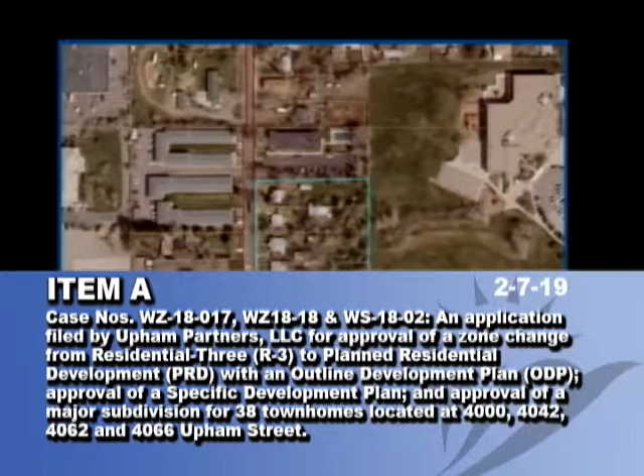So we'll start as we typically do. If we could have the lights come down a little bit in here so we can see the slides. Thank you. We'll start with the aerial. This is a 2016 aerial. The subject property at 4000 to 4066 Upham is outlined here in blue. It's almost square in shape and nearly 2 acres in size, and you can see there's 4 existing single-family homes on the properties. They range in age and in condition. They were built between 1928 and 1952. The assessor has them listed in fair to average condition, and you can see that they're pretty small in size. I believe the smallest one is about 700 square feet and the largest about 1,200 square feet, and notably smaller than the lots on which they sit.

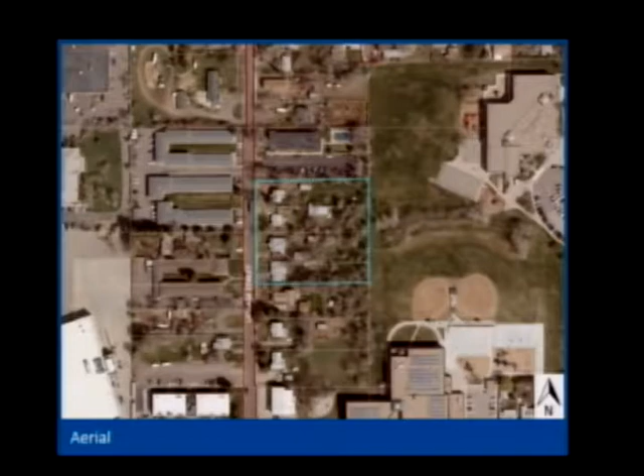You can tell from the roof lines in this image that there are a variety of housing types. So there's 4 multifamily projects that surround the property. One immediately to the north here is about 2.5 stories. 3 on the other side of the street, a C court, 2 buildings on a single lot, and then another sort of C court to the south. Those range in densities of 21 to 26 units per acre. Some of those were built before the city incorporated, which is why they exceed our 21 unit per acre density cap. There are a few more single-family homes to the south of the subject property and another across the street.

The property to the east is owned by Jefferson County Public Schools. It's about 19 acres. It's functioning as a campus. Stevens Elementary is to the south of their property on 38th Avenue. Sobesky Academy you can see on the northern side here. And then they have a variety of play fields and ball fields. The sort of forested area immediately east of the subject site is the school campus's detention area. It's a fenced area, and that abuts the subject property.

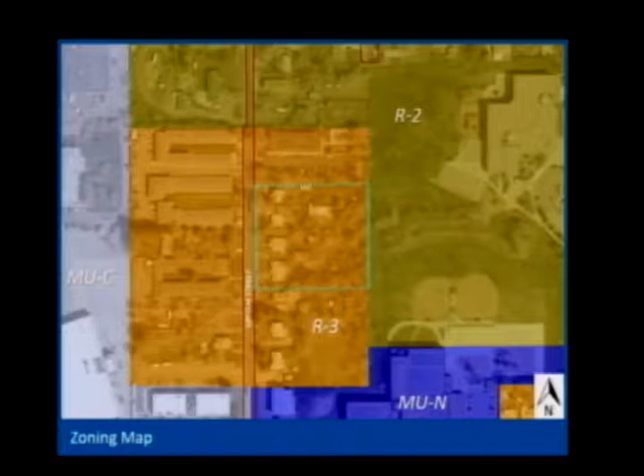As was mentioned, this application tonight includes 3 components. So the applicant is proposing to redevelop the site into 38 townhomes and to rezone the property from residential 3 to planned residential development. Any planned development in the city is comprised of 2 documents, the outline and specific development plans, and we'll be looking at both of those tonight. The ODP establishes the zoning and includes development standards. The SDP, the specific development plan, shows the details of that development: site plan, building elevation, landscaping, lighting.

The third component that we're looking at tonight is the subdivision plat. That's a technical document that prepares land for development, establishes lot lines, easements, and right-of-way. For the purpose of tonight's presentation, I'm going to walk through all 3 of those documents and then talk about the review criteria and staff's findings.

At the end of the evening, we'll ask the commission to make 3 separate motions, 1 for each of the documents. The code does allow for concurrent or sequential review of these 3 documents. We often see an ODP and then maybe an SDP and a plat together. We do occasionally see all 3 together. The way the code is written, it's essentially the applicant's choice, and so tonight we're seeing all 3 components.

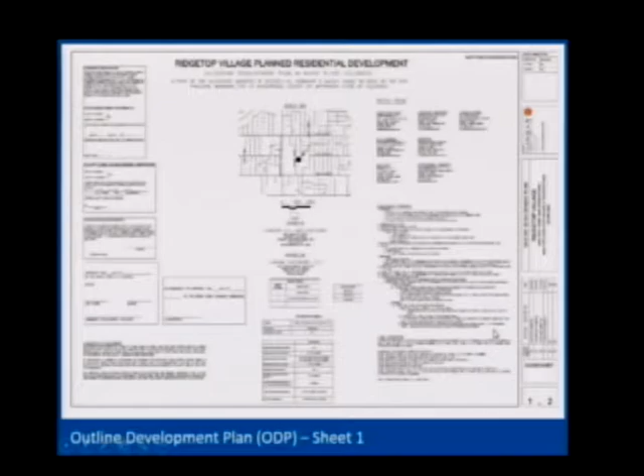So we'll start here with the outline development plan. In this case, it's 2 sheets, and again, this is the document that establishes the planned residential development zoning. The cover sheet, I know it's illegible at this scale, but it essentially includes a vicinity map, our standard signature blocks, legal descriptions, and sort of the meat of this document, which are the development standards that I'll walk through here in a minute.

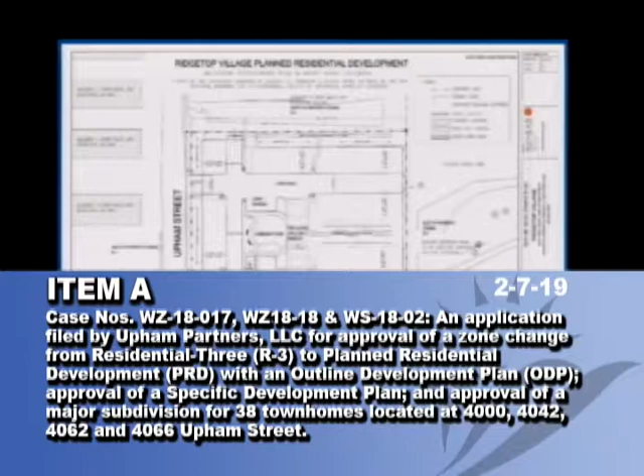The second sheet is a required component. It's a graphic sort of bubble diagram of how the development is proposed to be oriented in terms of general building locations and circulation patterns. We won't focus too much on this specific graphic because we have the benefit tonight of looking at the specific development plan. We can get a little bit more into detail, but it does complement some of the development standards that I want to walk through.

So the permitted uses for the project are proposed to be simply townhomes and open space. Those would be the primary uses. The ODP does call out a few accessory uses, so customary for a residential project, household pets, home-based businesses. It specifically prohibits RV and boat storage. That's something we've been seeing frequently with a townhome project where there's just not space for that.

In general, the project complies with the R3 zoning, which is the current zoning. Maximum height, 35 feet, that's our standard maximum height in all residential zone districts. The density is the biggest outlier from the R3 zoning. Again, they're proposing 38 units. That does come in just under our maximum of 21 units per acre and is compatible with those other multifamily properties that I mentioned.

Setbacks are relatively similar to the R3 standards, so front minimum setback of 15 feet from Upham Street. And then the side setbacks vary a little. What they're proposing is a 10-foot setback for this westernmost building at the north and south, and then increasing to a minimum of a 20-foot setback for the longer buildings that are along the perimeter of the property.

Because there's no development to the rear, there is a 5-foot setback proposed at the rear of the property. Parking is proposed to have 2 garage spaces per unit, 9 visitor spaces, and then 8 on-street spaces, which will be added by virtue of the applicant constructing curb, gutter and sidewalk.

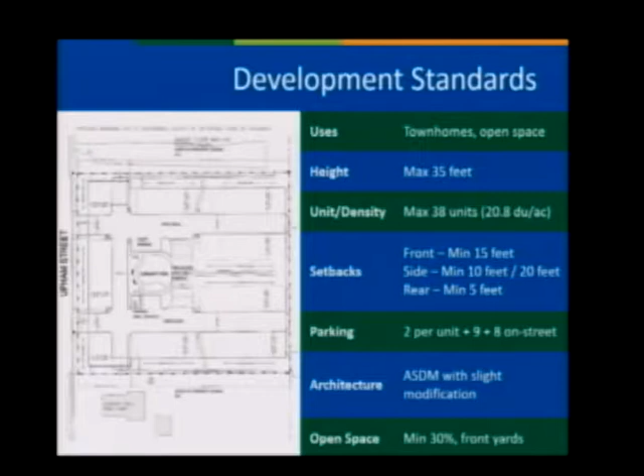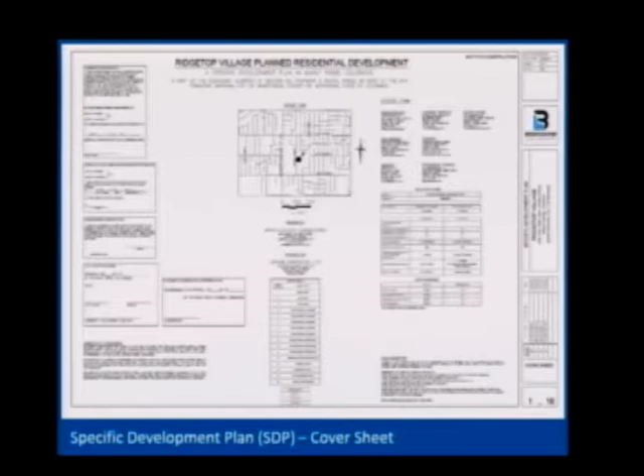So we'll move on to the specific development plan. All of these drawings should illustrate that they comply with the outline development plan standards that I just walked through. This document is quite a bit longer. It's 16 pages in total. Both documents get recorded at the county and run with the property. We're not going to go through all 16 pages tonight, but we'll hit the highlights with the site plan, landscape plan, and some of the building elevations.

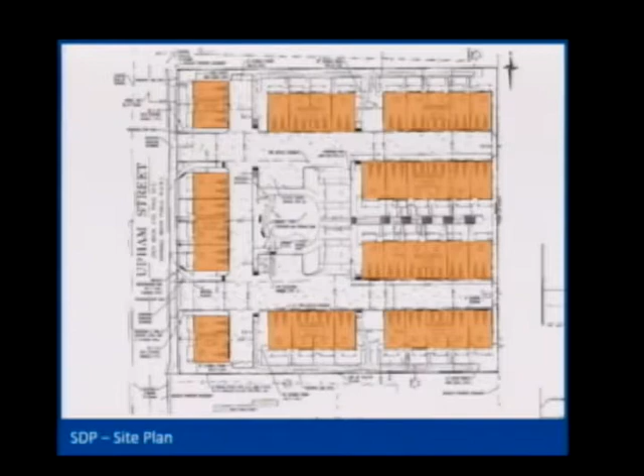So we'll start here with the site plan. The orange shading that just appeared highlights where the buildings are located. In large part, they run along the perimeter of the property with two more buildings in the center here. So the 38 units are broken up into ranging from 2 to 6 units per building. As I mentioned, they all have 2-car garages, and those are denoted by the gray triangles that you can see.

Those garages are all tuck-under parking, meaning they're on the ground floor with living space above, and they're all alley loaded. So the alleys that serve the property are now shaded in gray and laid out in a grid-like fashion. There's 2 access points proposed along Upham. That's required by the fire district to have 2 ways to get into a project of this size.

The applicant was required to provide a trip generation letter, and that indicated that the project generates about 14 to 17 trips in the peak hour. Anytime a project is under 60 trips at peak hour, we don't require additional traffic analysis. So this project, we don't have any concerns about needing to widen Upham, for example, for a project of this size.

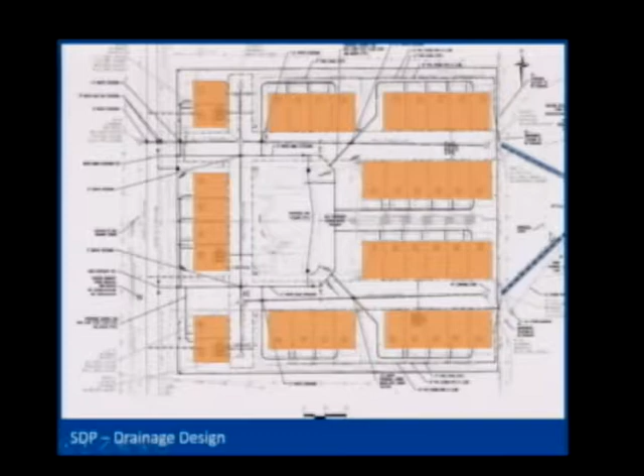This image is another version of the site plan, but highlighted on the right-hand side are elements of the drainage design. It is an off-site drainage design, which we don't see all that often, but again, what's unique here is the site is relatively flat, which is great for constructing buildings, but really challenging for making a drainage design work, complicated by the fact that we don't have storm sewer in Upham Street.

So what the applicant did was work really productively with the school district to have a joint use of the existing detention facility that you saw earlier in the aerial. So they'll be piping the flows from this site to that existing detention facility and modifying it as needed.

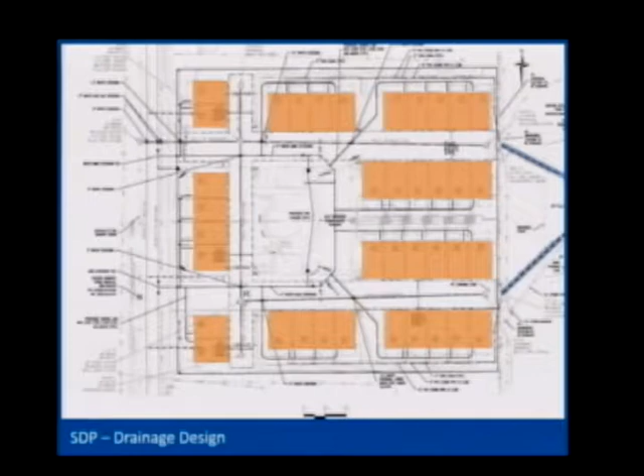The school's been a good partner on this project and is ready to sign the necessary agreements regarding maintenance if and when this project were to be approved by the city. Their standard is not to sign those documents until they need to if the project is to move forward. If there's more questions on the drainage design, I should point out that the applicant's civil engineer is here, as is my colleague Jordan Jeffries from the Public Works Department.

They do exceed our R3 standards in terms of the numbers of trees and shrubs. We typically require one tree and 10 shrubs per 1,000 square feet of required open space. So it's in excess of 250 shrubs and 40-some trees.

We're not looking at the photometric on this slideshow, but it is included in the specific development plan. All of the sidewalks along the perimeter and through the site are proposed to be illuminated by decorative bollards with downcast light, so providing sufficient safety and lighting without disturbing the neighborhood residential feeling, that character of the project.

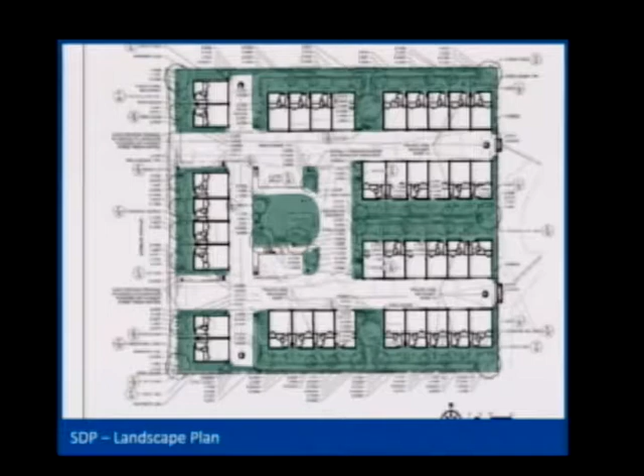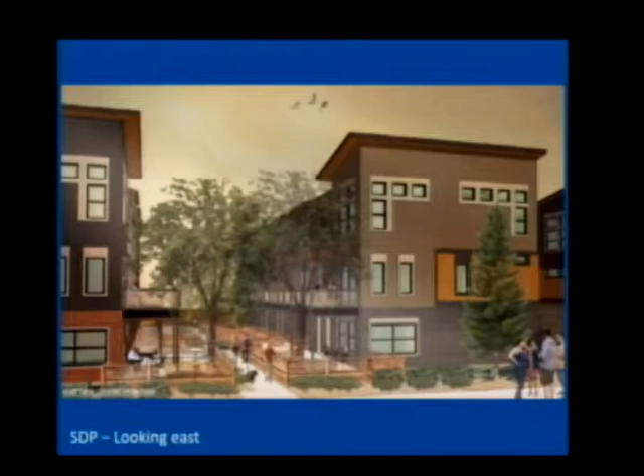These are a couple of renderings. They're not included in the recorded specific development plan, but they're a good visual and three-dimensional view of the scale of the project and particularly of that open space. So you're seeing in this view looking east from the middle of the project, the front yards that face each other for those two central buildings. Helps you to get an understanding of the spacing between those two buildings, a little bit wider than we typically see in a townhome project.

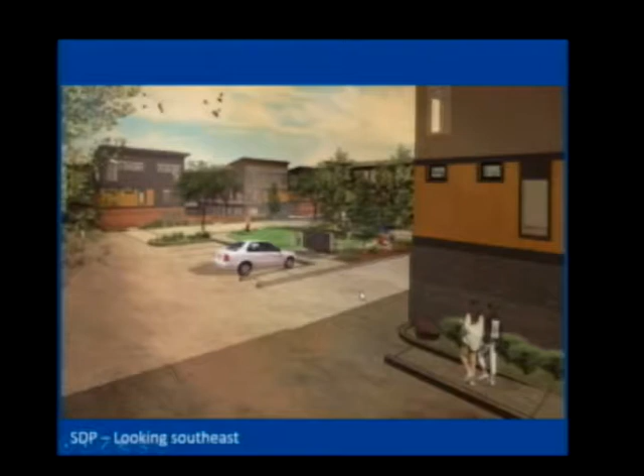The other features that you're seeing in this image are some of those architectural styles. So a variety of roof lines, masonry bases or first floors on the buildings, and a variety of siding colors and orientations, some vertical, some horizontal.

The other feature here are the windows. So windows and light are often a focal point of mid-century modern architecture, and you can see there's really an abundance of windows on this project. It's particularly helpful for townhome projects, we think, where interior units tend to have fewer window options because they only have them on the two sides of the building.

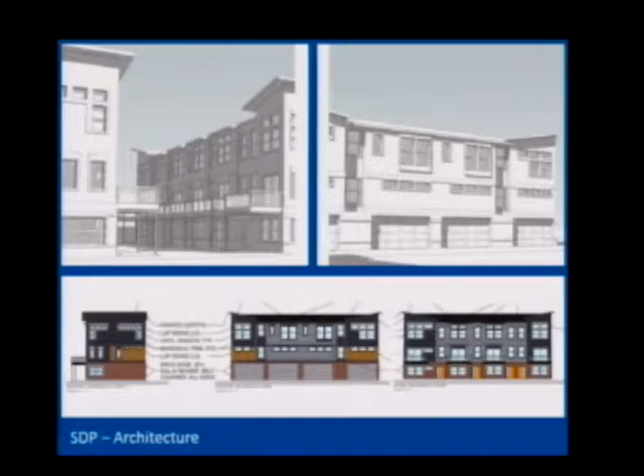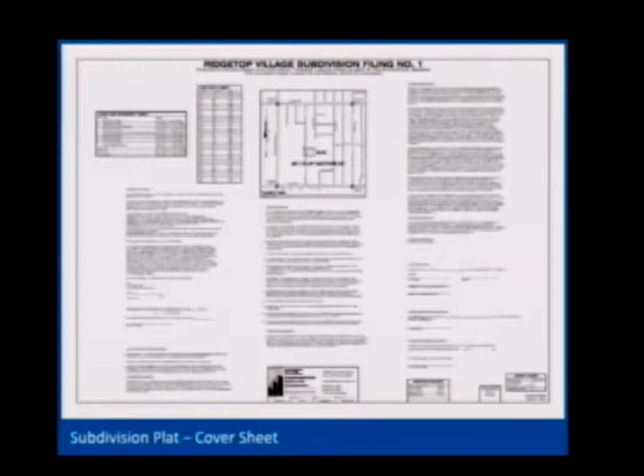The next component of the application is the subdivision plat. And as I mentioned, that's the document that prepares land for development. So there are 4 existing single-family homes. This document would remove those existing lot lines and create the new lot lines. Again, the cover sheet here is including a lot of standard notes, legal description, vicinity maps. There's 2 pages of graphics that we'll walk through here briefly.

So the first page establishes the lots and the tracts. So 38 lots, 1 for each of those townhome units, and then the open space and common areas are all contained within a variety of tracts. So alleys, sidewalks, parks. The purposes of each tract are noted on that first sheet.

As with any subdivision or development, we look at the adjacent public street to confirm whether it meets current standards. And in this case, Upham Street is substandard. So the tract on the far left side of the property, it's sort of narrow in this area, is about 6 feet in width. So that dedication to the city will allow for the applicant to build that on-street parking, curb gutter, and sidewalk. The southern part of that right-of-way dedication is quite a bit wider.

This is a little unusual, but parts of Upham Street were never formally dedicated, so they're essentially prescriptive right-of-way, meaning they've functioned as a public street for long enough that they're considered a public street. But this subdivision plat dedicates to the center line to officially dedicate that southern portion. We had a similar situation, the commission may recall, with the Weston 38 project, where we had to dedicate to the center line of Upham.

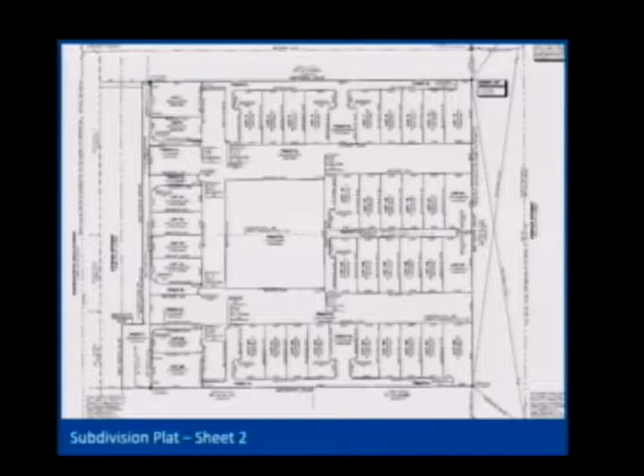As is typical for a larger development project, dry utility design is often ongoing, particularly with the way that Xcel's design processes work. So the applicant has been working with Xcel and Comcast and other utility providers. We've requested a standard condition whereby dry utility easements are shown on the plat if they're finalized by the time it's recorded. Otherwise, they're often completed by separate document. Even these two easements, which are shown here, would likely be created by separate document, which would be signed by the utility districts and simply referenced on this page. So those are the three documents themselves.

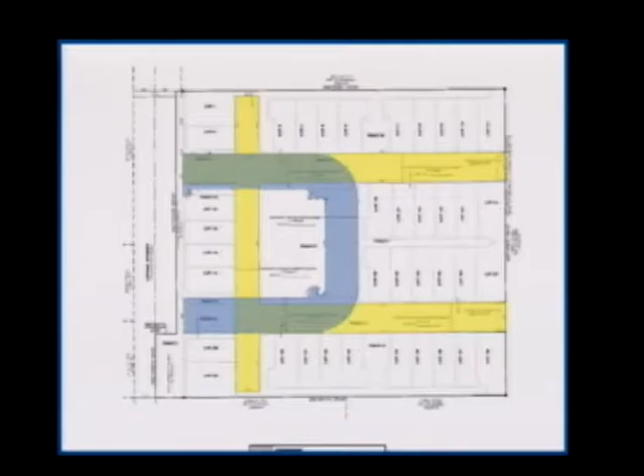I want to talk a little bit about process. A neighborhood meeting is required as a precursor to a zone change application, and we held that meeting in January of last year with 9 folks in attendance. When we did receive the application, we sent the ODP, the SDP, and the plat on referral to all of our utility providers, and didn't get any concerns from agencies. Again, the applicant's been working very closely with those providers. Internally, these applications are reviewed by planning and public works, building, parks and recreation. In this case, and as the commission is aware, for residential development, we have a land dedication requirement. That central park is not considered a public park, so there is still a fee in lieu of parkland dedication.

There was a 15-day public comment period leading up to this public hearing, and we did receive 3 written letters of support. Those were included in the packet from adjacent property owners. We've received 1 phone call, but no additional comments related to the project. The phone call was an inquiry. There are several sets of criteria that we look at when we're reviewing this kind of application. So we'll start with the zone change criteria.

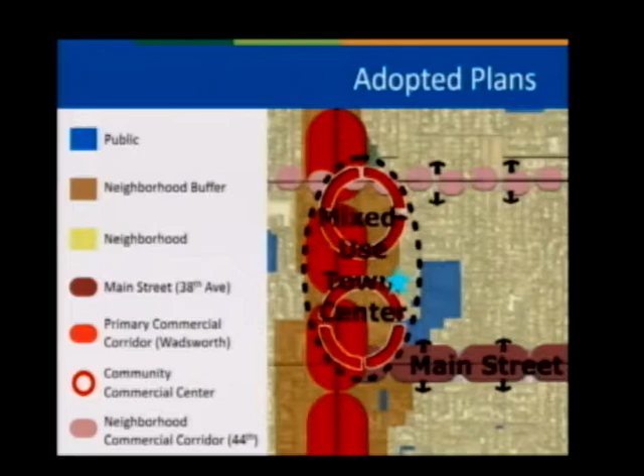The comprehensive plan calls for reinvestment on Wadsworth and 38th and within the town center area in general. And there are 6 key values that the comprehensive plan is organized around, one of which is to promote vibrant neighborhoods and an array of housing options. We certainly believe that this project supports that value and those goals. It provides a new housing type. There's not townhomes in this immediate vicinity, and it also attracts new household types. You know, there's a house for every person and a person for every house, and the townhome product could potentially attract a new type of household to the community, which is one of the goals of the city.

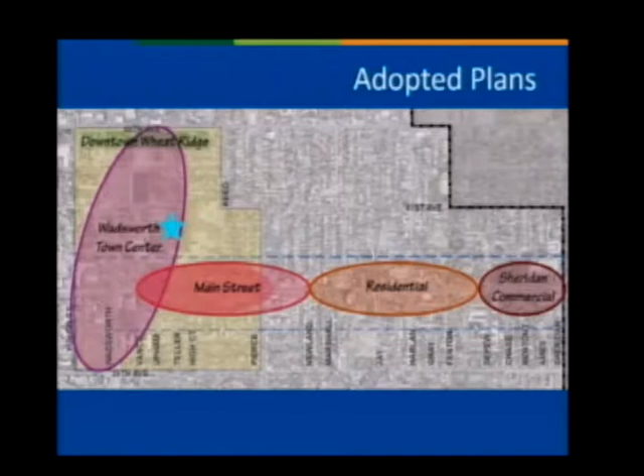This project, the site is well within walking distance of 38th Avenue, and it supports the 38th Avenue plan calling for robust commercial and residential markets. It's a project that is expected to add value. The traditional saying is that retail follows rooftops, and so we've had a lot of investment in the area and some new residential products, which are shown on this next image, a land use map.

We think the project is appropriate given the land uses and the mix of uses on the street and following those other investments made at either end. Again, it's a project that's providing more home ownership opportunities, which is a comprehensive plan goal. And ultimately, staff does feel that this request is supported by the zone change criteria.

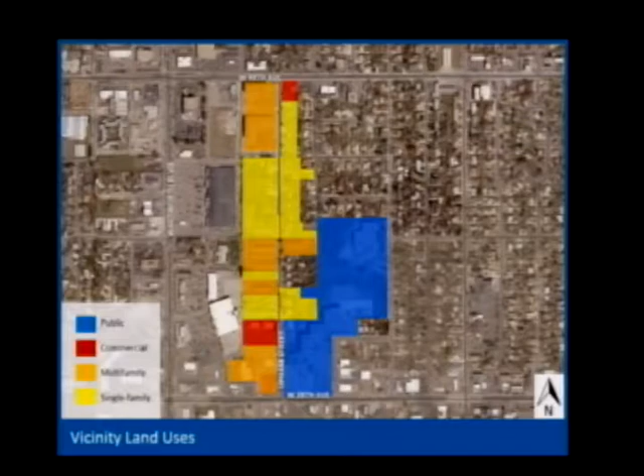There are also criteria for review for a specific development plan, namely that it complies with the intent of a plan development, which, as I mentioned, is often to promote flexibility but also encourage innovation in design. The SDP is consistent with the uses and standards outlined in the ODP, and there's adequate infrastructure to service that development. The subdivision is consistent with the subdivision regulations and with that proposed zoning document.

And so ultimately, we are recommending approval of the outline development plan, recommending approval of the SDP with one condition that was omitted from the staff report. We noticed that the cover sheet table has one row that's missing data on the height of the buildings that should be filled in. That was just an oversight.

And then lastly, for the subdivision, recommending approval with a variety of our standard conditions. We typically require a subdivision improvement agreement that outlines the developer's obligations to construct those improvements on Upham that I mentioned, the requirement to pay that parkland fee in lieu of land dedication, review of homeowners association covenants, and a variety of other standard subdivision conditions. That's the end of my presentation. I'm happy to answer questions, and I know the applicant would also like to make some remarks.

Great, thank you for that report. Let's start with questions over here with Commissioner Weaver. Do you have any questions? No. Okay, Commissioner Leo, any questions? Commissioner Voss? Lauren, are the utilities being provided in this new subdivision underground? Yes, that's a good question. For all new development, utilities are required to be undergrounded. Okay, thank you. All right. Any other questions? Mr. Larson? I'll pass for now. Okay. Commissioner Dorsey? Commissioner Rowe?

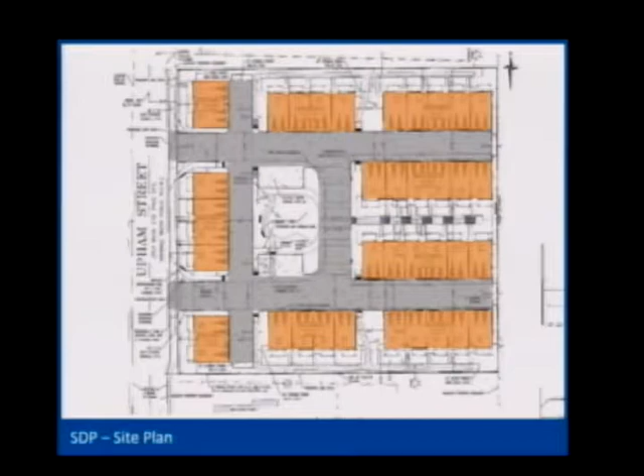Any other questions? Yeah, the only other thing, the height of the building, 35 feet, is thrown around. It seems like I read somewhere that the actual height of the building is 30. It ranges a little bit because of the different roof lines. So the highest height measurement that I was taking today, to make sure we had that condition of approval, was 34 feet. So they range a little bit. Let me show you just the way that we define building height because of these different roof lines, essentially.

That's it. All right. Commissioner Larson, did you have something? Yes, thank you. Lauren, in the subdivision plat, there's a discussion about homeowners associations. And I believe I understand how HOAs are set up and their responsibilities, but if you could help us understand, or help me anyway, understand what a metropolitan district would do and why that would be chosen over an HOA.

So I'll give you my understanding, and probably a good question to ask the applicant also as they're continuing to weigh those options. So a homeowners association is established for a project like this often by the developer, and then the owners are the members of the HOA. The covenants would prescribe what the HOA fees are, and those are calculated based on the maintenance obligations. These are multiple owners of a single building envelope, so those obligations include things related to the building, the landscaping, the drives, the detention.

A metro district can serve a similar function in terms of maintenance. Metro districts, instead of collecting an HOA fee, it's a mill levy. It's a quasi-governmental entity. It's a district, so it's protected differently by state statute. And they can also issue bonds. So we see metro districts increasingly with infill projects, when the infrastructure costs are inordinate. In a project like this, and particularly in Upham, there have had to be sanitary sewer upgrades. So aging infrastructure needing to accommodate new development will often warrant the creation of a metro district when there are inordinate off-site costs.

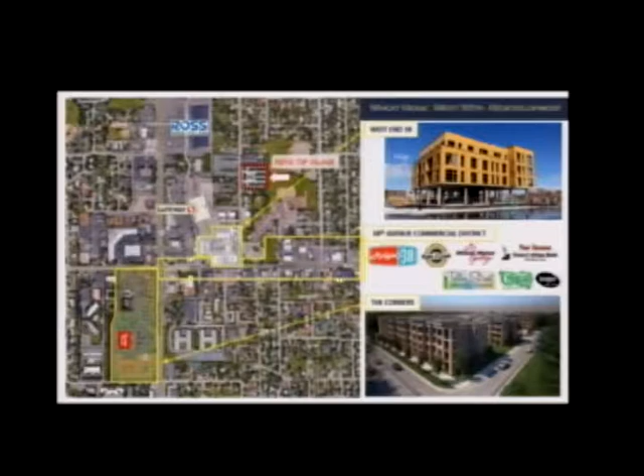We just felt the buyer profile in Wheat Ridge didn't want slot homes. This is not front doors 5 feet from property lines. You can drive down the streets and see examples of that, and that is not nearly what we wanted to create here. So we've spent a lot of time focusing on the Upham Street frontage, working with our neighbors. We had 3 or 4 different neighborhood meetings, trying to make it as compatible as possible along that, and just having the opportunity for the park. We've done a number of these, and we haven't done one like this. We've had a really unique opportunity with an infill situation with a little bit of suburbanism, but a little bit of lifestyle that we can add to that.

I do want to maybe address a couple of those questions since I'm up here regarding the Jeffco agreements. We're actually in final form on those agreements. Final signatures are going around, today, signature versions of that. So they're almost executable, and we do have a temporary construction easement. That'll give us the right to come in through, right underneath where that arrow is, an easement from their parking lot over to the back of our property. And so we'll have a temporary construction easement, and that will get replaced by a long-term maintenance and access agreement, which will be governed and maintained by either an HOA or a metro district. And the decision on that is still being decided upon.

The fact that we have this basin on a public piece of property, and having the strength of the metro district being better than an HOA, we strongly feel that there's a benefit to the school district and to the homeowners for long-term maintenance. It's a very critical piece of infrastructure. If it fails or doesn't get maintained properly over the long term of the project, we have issues both on our site as well as for school children. So we need to make sure we do that right. We think that's the better long-term facility.